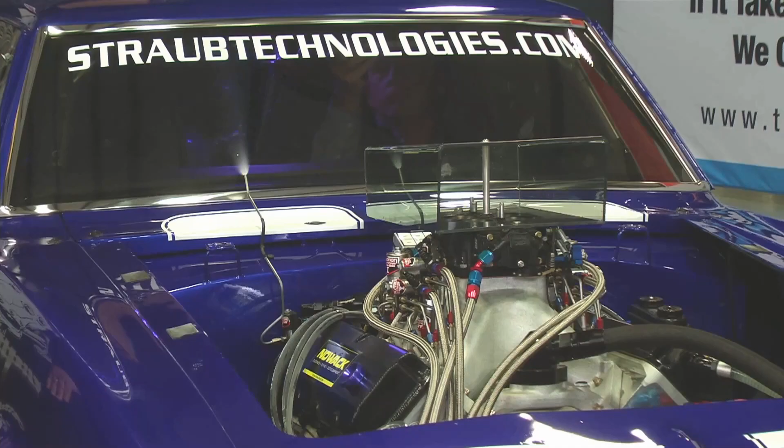Warren, these machines, you told us a little bit before, have just totally changed the way you can efficiently produce, try ideas, and do things. And we look at a guy like this, 21 years old, he's already working on the machine. We're going to work on some stuff here. Maybe you see a little bit of yourself in some of these young folks.

And Jordan, you guys were talking already. They were discussing speeds and feeds and different things about keeping the surface as clean as possible. Talk a little bit about that and how that information is obviously constantly updated.

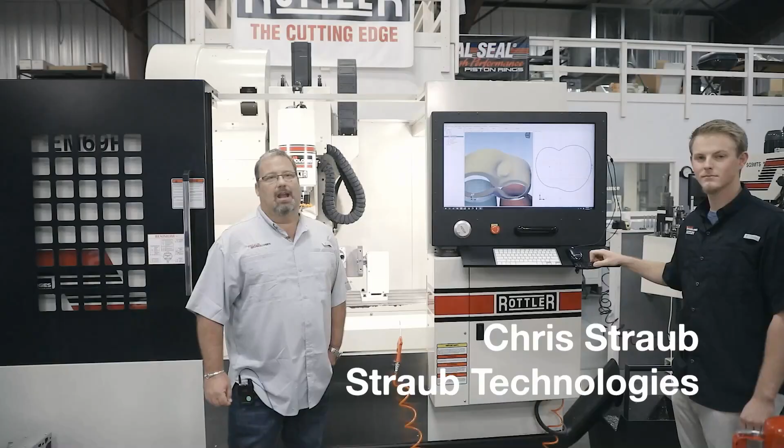Hi, I'm Chris Straub with Straub Technologies, and I'm here with Jaden McCurry. Jaden operates our EM69H Rottler CNC center that we use for porting. At Straub Technologies, we had come to a point where we needed something that could replicate the development work that we had been doing here for cylinder heads. Asking a few questions of people, what CNC cell we needed to buy for CNC porting, one company kept coming up, and that was Rottler. One reason is because Rottler is a self-contained digitizing and machining center. Not only can we use the Rottler to do the machine work, but it can also digitize the part that we want to replicate in the machine.

Straub Technologies grew from my garage. Never thought that I would be doing anything like this. I've been in the industry for 25 years, but people now with the DIY mentality, they want to be that Grumpy Jenkins. They want to be that Keith Dorton type person and build their own motor. So with the Rottler, being able to produce over and over again the same quality part was important to me. I need to provide something for my customers, and that's what the Rottler machine allows us to do.

When I bought the Rottler, Rottler came to me, and in talks, they said, Chris, you don't have to know speeds and feeds and all this stuff. The machine knows that.

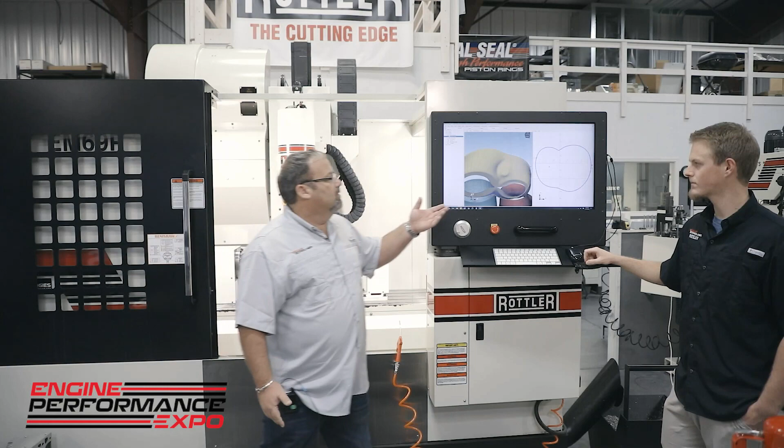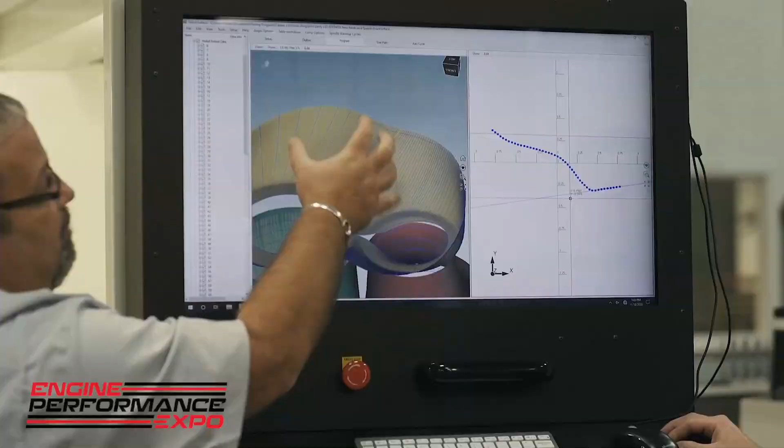So one thing that we do enjoy about the machine is the manipulation of any of the data points that Jaden is able to capture using the Renishaw probe on the cylinder head, easily seen here. And all of these lines presented captured data in the combustion chambers. Each one of these is where the probe has touched, so it's mapped out this combustion chamber of this cylinder head. And Jaden can then go into his computer system in his office, and anything that he needs to smooth or reshape is easily done.

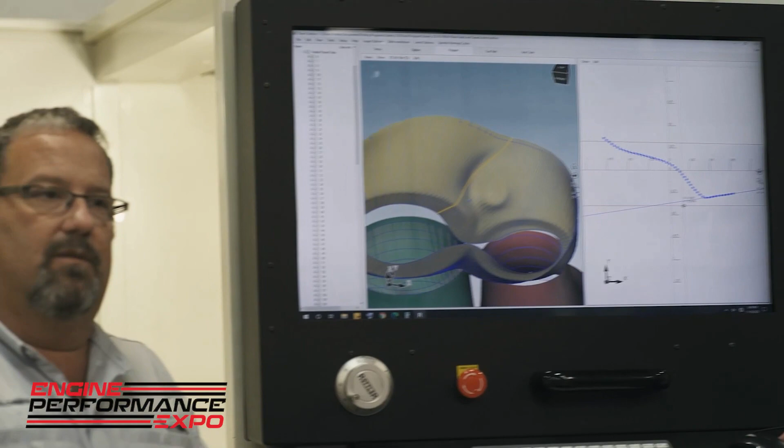That's one advantage the Rottler has over multiple machines, its ability to capture data so fast. You'll hear about people that have digitized over the years, and it might take them a week to 2 weeks to do an intake port, an exhaust port, and a combustion chamber. Jaden's been able to do this in a matter of a day. So why it's important to me is I don't have to have as many people, but can produce as many parts as some other much higher volume shops. So for me, as a small business owner in the automotive performance industry, Rottler was my choice.

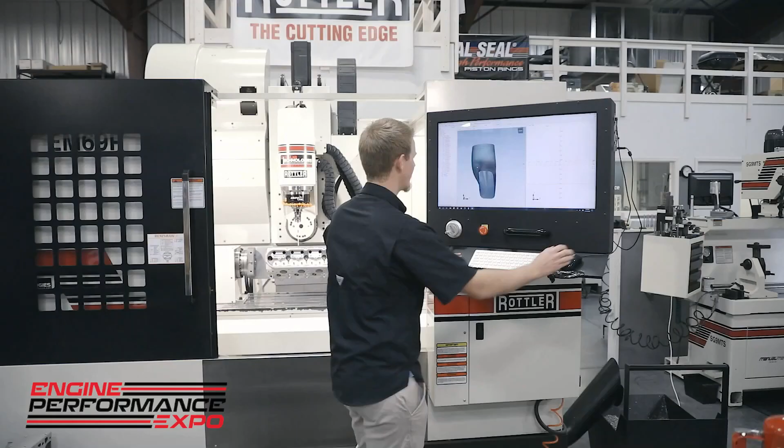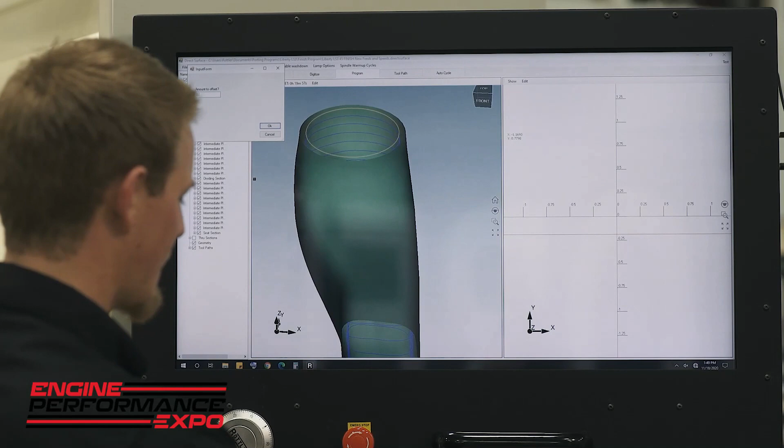Yeah, so this is a port that has already been digitized, and it's already got the through section, so it has its solid surface. If I want to go through and change, say, the plane that's right here on the seat surface, if I want to shrink this entire section, it's as simple as right-clicking on the plane. You can go to section offset, if I want to offset it, say 250 thousandths, just so you can see what it does. You can see it blew that entire plane out just that quick.

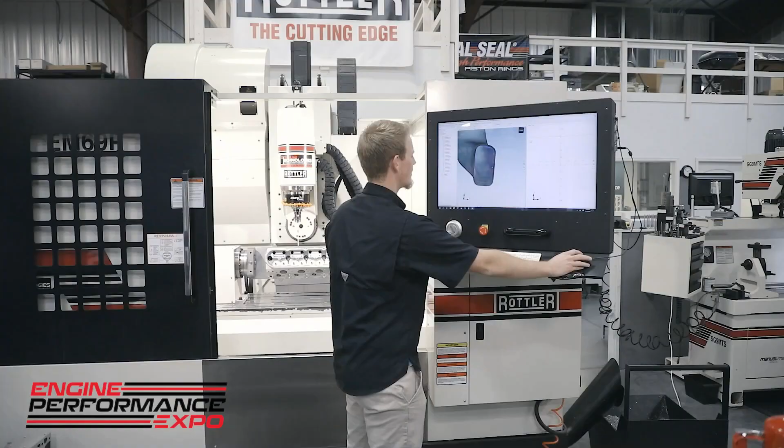So every little change that you make on this thing, you can see all the results just about as quickly as you want to do it. So you want to change the radius in the corner of this plane. Click that, you can change your arc. So you just make it a straight line or whatever. And you can see it right there immediately as you do it. So it gives a really good representation as you go through if you want to smooth things. There's really not a lot of waiting to get things happy like you want it to.

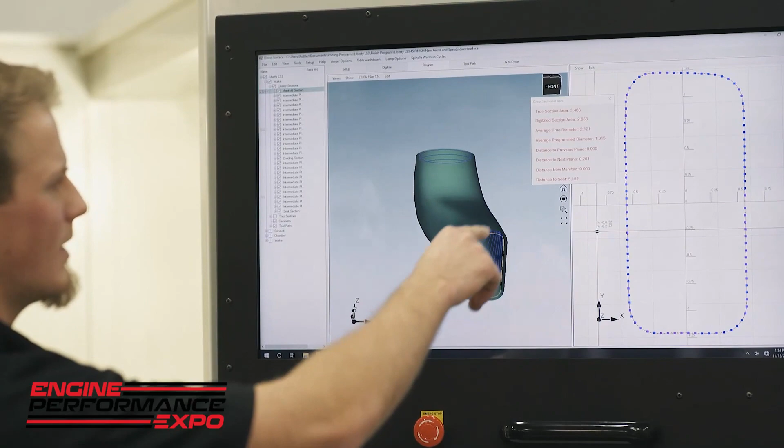With each plane that you go through and digitize, which is what all these sections are with the data points, it keeps record of the sizes, so it's got its own little graph, like a little representation you can keep track of, and you can check out your cross-sectional areas. So you pull the list up, so this right here is the manifold section, the first section on the manifold side for the intake port. It gives you your true section area, digitized section area, average true diameters, program diameters.

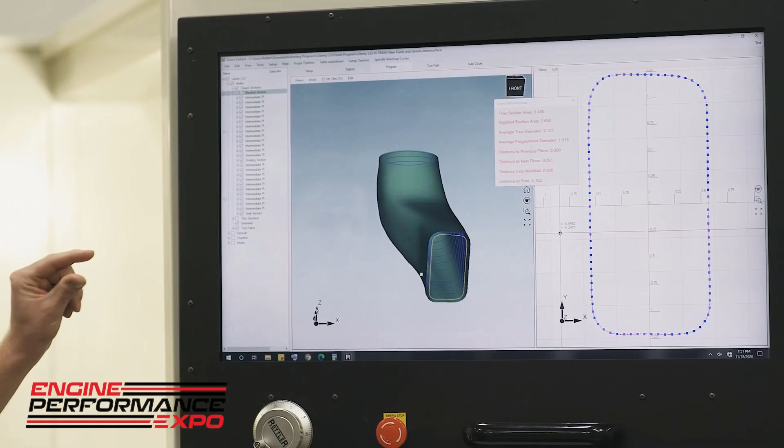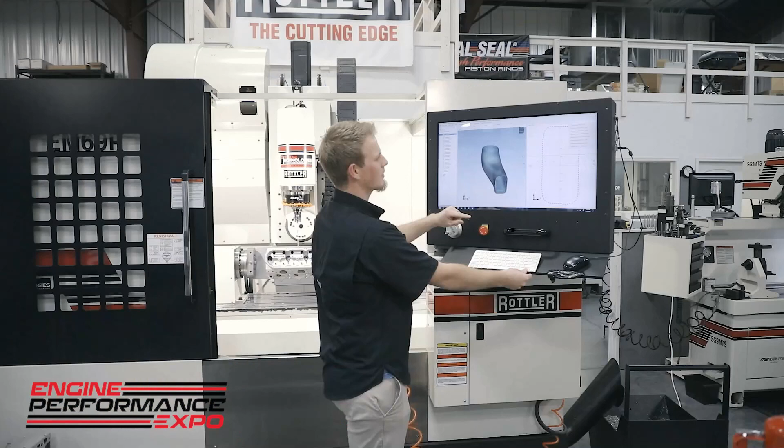It gives you the distance between the planes. It'll tell you how far you are from this manifold plane. So I'm starting right here at the manifold section. So right there it says distance to the next plane, you got 261 thousandths. If I go to the next one, it shows distance from the manifold, so it shows that we moved 261 thousandths. So if you pick a random plane throughout your port, it can give you an idea of how far into that port you actually are.

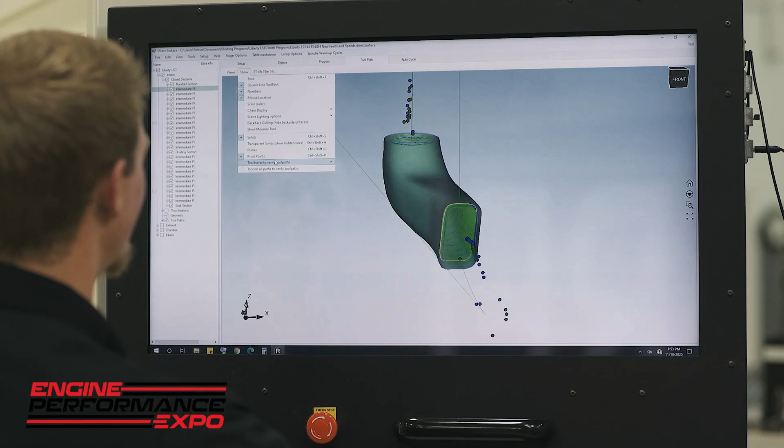Honestly, my favorite feature about this machine is after you've created your ports and you've got your tool paths created, it'll show you where your tool has run. In previous updates, you can hover your tool and it'll show a rendering of it pivoting on these pivot points as it goes through the port. And with the more recent updates, you actually have a function that will show you every spot that that tool moves throughout that port.

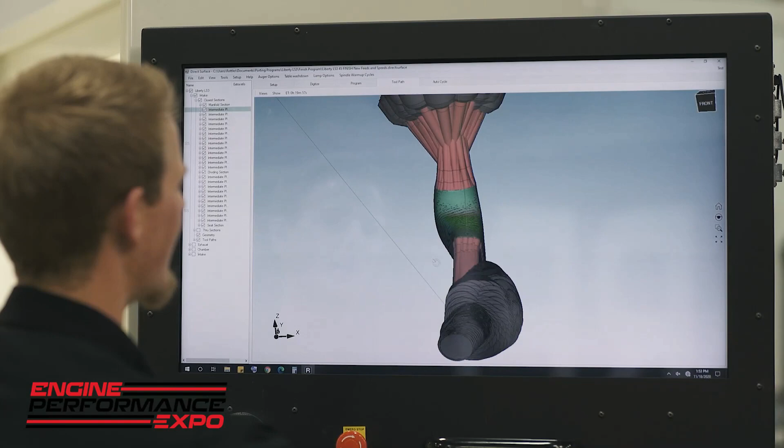And it's really nice because if you have long ports or ports that are making really sharp turns, if that tool is going to get down and try to rotate where it would actually dig into the opening surface, it'll show you that the tool will be poking through the side of the port. So instead of having to hover back and forth and hope that you catch it with your eye, or running it and just being really careful, you're almost guaranteed that you're not going to hurt anything with that feature.

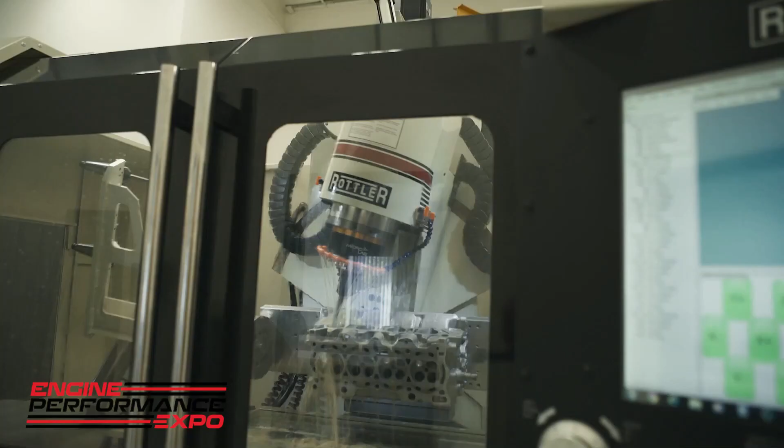Standing in front of our Rottler EM69HD, it's a cylinder head porting machine. Years ago, we were all kind of talking about possibly purchasing a machine, because we were porting a lot of cylinder heads by hand and it was taking just way too much time. You know, literally 8, 10, 12 hours or more for import heads and V8s. We do a lot of imports, a lot of domestic stuff.

So we looked at a bunch of different machines from a lot of different manufacturers. The Rottler basically stood out in front because it's an all-in-one type of machine. So we can hand port a cylinder head, get it on the flow bench, make little changes or whatever we want to do, get the head in the machine, actually digitize it in the machine, do all the modeling, soft modeling, look at how the port design looks, create all the tool paths, run little tool paths, make changes on the fly if you want, and actually port the head in the machine. It doesn't have to come in and out, in and out.

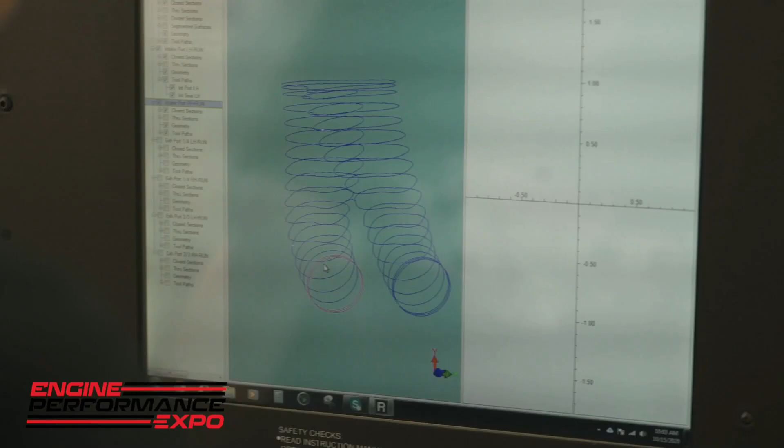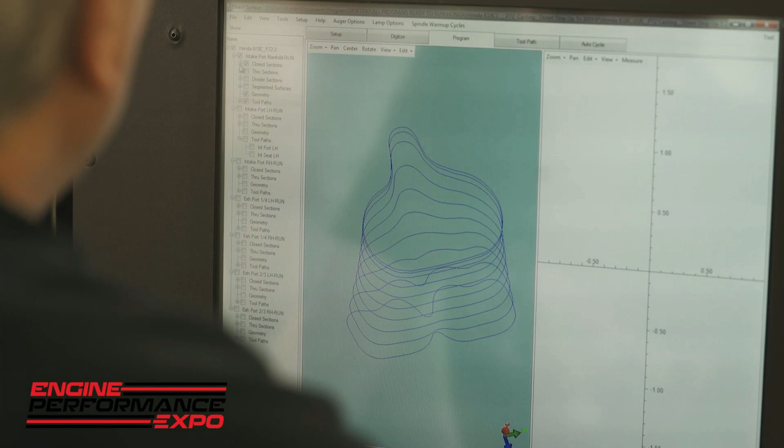Stuff that used to take us, like I said, 8, 10, 12, 14 hours, now with this machine, the CNC cycles are generally 2, 3, maybe 4 hours at the most. So you're definitely saving a lot of time. So basically with the Rottler software, after the head has been ported, you put it in the machine, and we start the digitizing process. The probe will come down and actually digitize each of these little pie slices, as we call them. So it's making a digital copy of what you hand ported.

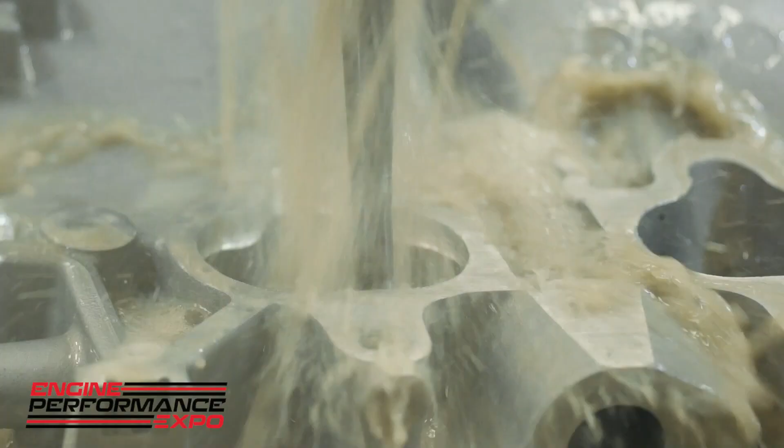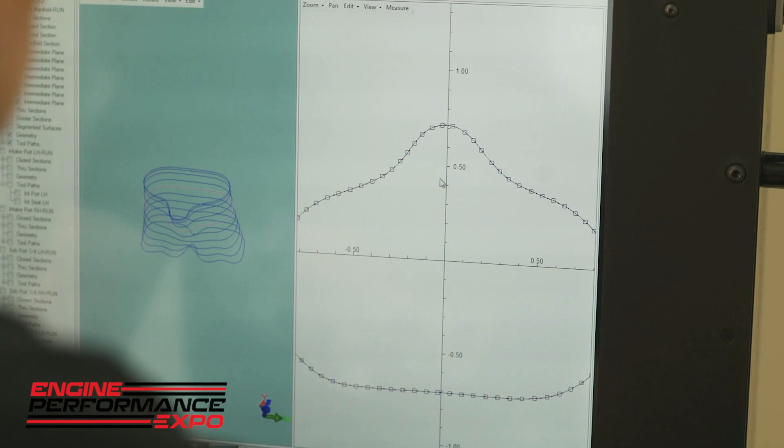And once these are all digitized, if you want to edit the shape of any of these, you can just grab any of these lines and points and move them. So if you don't like the way a curve is, or maybe the probe hit it just a little funny, or your port wasn't as perfect as you thought it was, you can edit it there. They also have smoothing operations that will help smooth out the port and line everything up a little better for you. And it's all done on the machine.

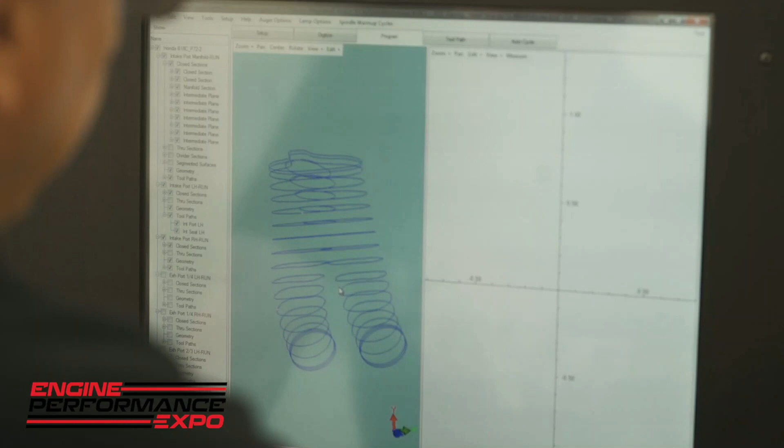And once you're done with that and you like what you see, then you can start creating the tool paths. After it's digitized, if you have to make any changes, you can make your changes. You can click on any of these points. You can move stuff around. It has smoothing operations to blend the stuff a little better. Sometimes when you hand port, you think you have it perfect, but you don't.

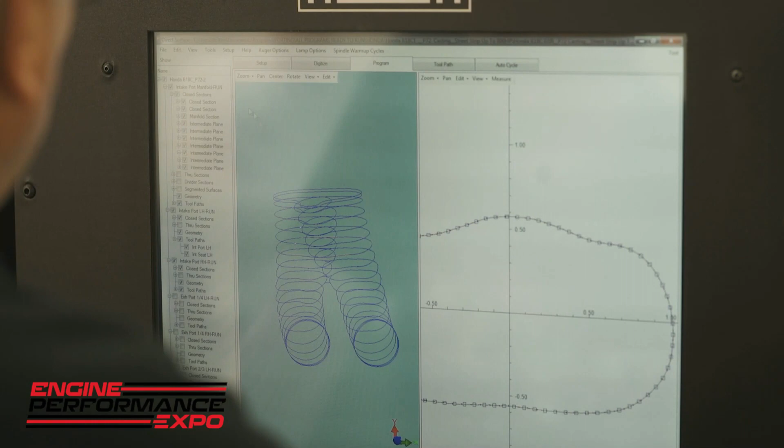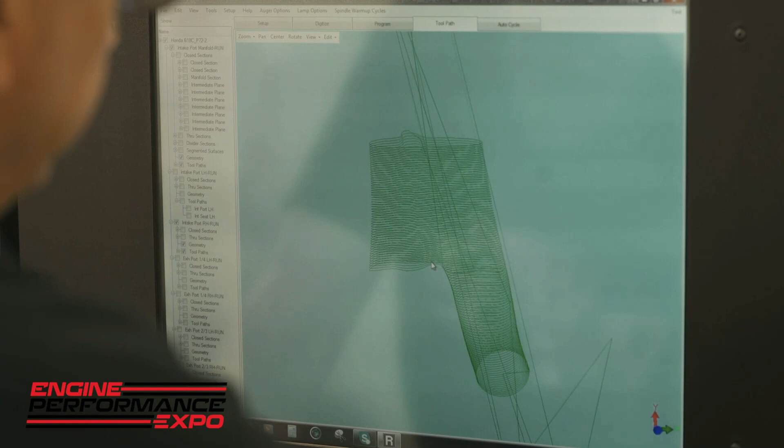So everything can be modeled and modified, and you can bring up a solid version and look at it on the port. So it's going to show you exactly what it's going to do before you actually start cutting the head. And you create all the tool paths. So basically all these green lines, this is what the porting tool is going to do, going through the cylinder head to cut it. And because it's saved and it's all computerized, it's going to repeat the same every single time.

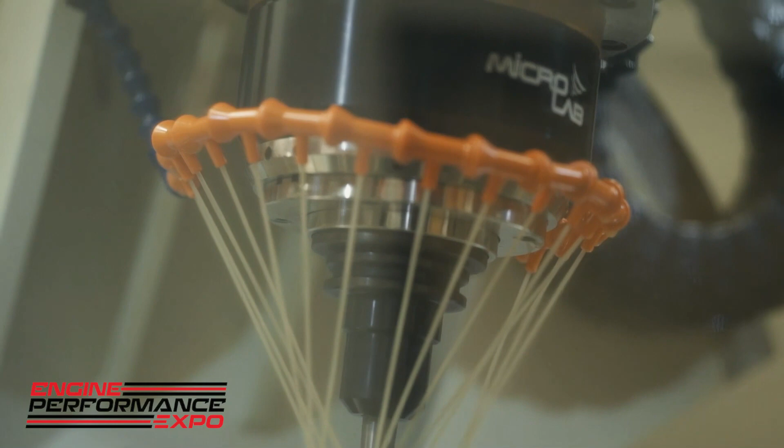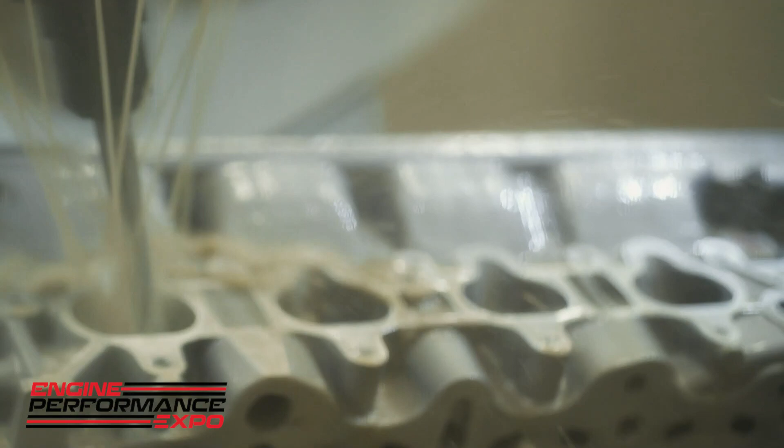We're not all about making the ports huge. We try to work with them, keep the velocity going and stuff like that. And with the turbo, you can actually CNC port the head, make more horsepower with less boost, which in the long run is going to actually help the engine. So you can have a little more streetable product. But if you do want to change it up, you do have the room to expand, pick up the horsepower level.

We're doing a lot of import stuff. Probably one of the hardest heads we started on and got trained on with the machine was the Subaru EJ series heads. Probably the hardest heads to jump right into. But we've got probably a dozen different programs just for all the Subaru heads alone, all the different castings and horsepower levels. We've got 400 or 500 horsepower street engines up to 1,100 horsepower all-out drag engines. And the sky's the limit.

The awesome thing about the machine is the repeatability. When you hand port, you can get tired, you can get sloppy. Like I said, the hours are just uncountless, but once the program is run, it makes it the same every single time. And if you do want to make a change, you make the change. If you like it, you save it, and it will do it the next time at the push of a button, basically.

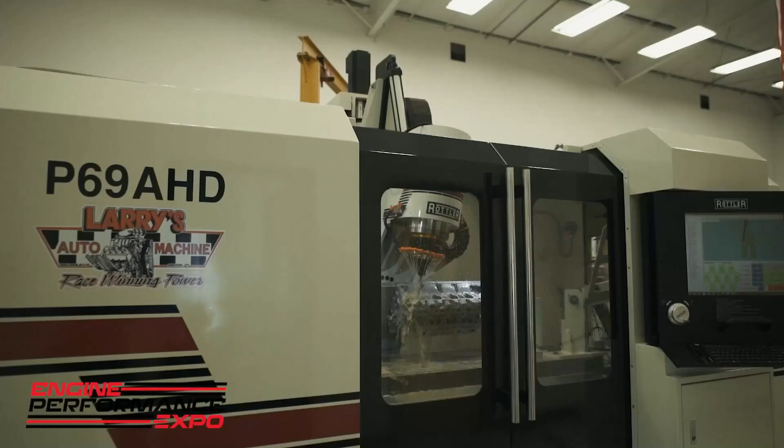We quite often get asked why we picked the Rottler over some of the other machines, and it's just we've had a relationship with Rottler, with the other machines we've bought in: the F68A serial number 1, outstanding machine, our cylinder hone, the H85, the seat and guide machine. But it's just the price for what you get is phenomenal.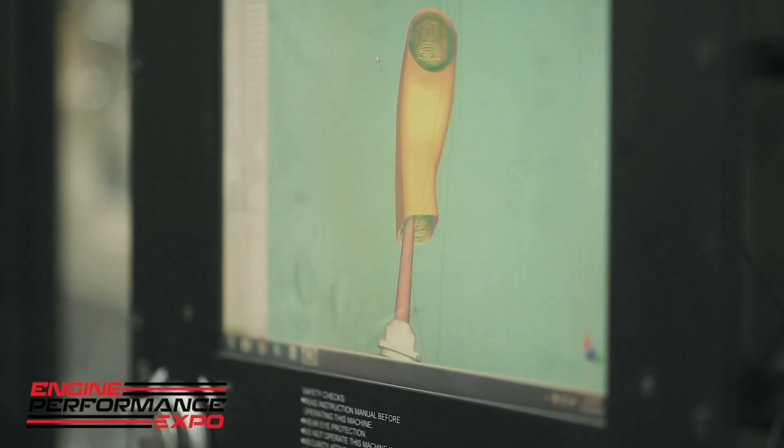My name's Brian Harrison. I work for BES Racing Engines. Worked for Tony for about 9 years. Been running these current machines here for about 7. We're here to talk about the Rottler P69.

We use this machine to run numerous cylinder heads here at BES, and this is one of our heads, a pretty known popular head for Ultra Street. It's a high port Trick Flow small block Ford head. We can run this whole particular head in roughly about 3.5 hours in this machine. Intake port, chamber, and exhaust port, and we also run our pushrod clearance in this too. That's kind of a nice feature to be able to do.

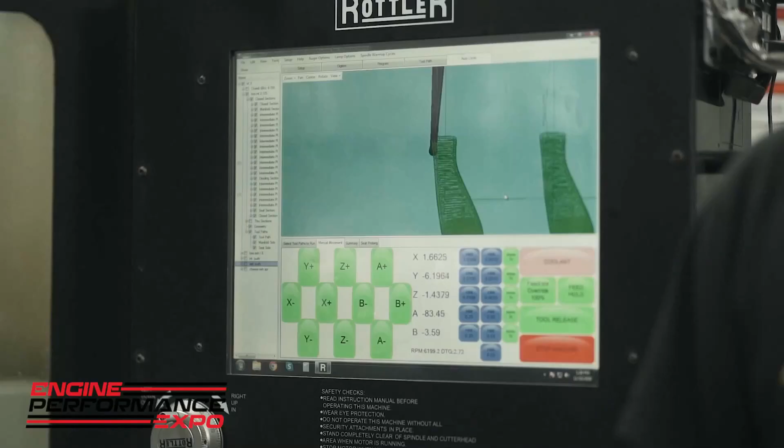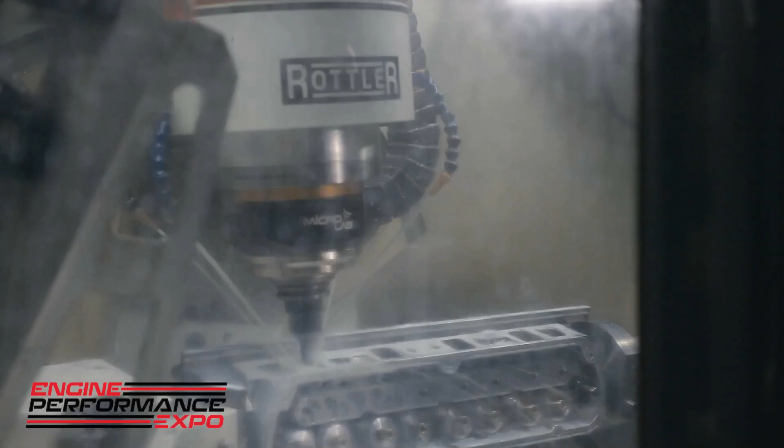This is an intake port. Sometimes we use different length tools because sometimes they chatter, just because of tool length, and try to cut more material out. We just try to cut as much as we can with our tooling. With a long tool like that, it's hard. This particular head here, we plug the exhaust bolt holes, then we face mill them, but I just do that manually. Just use a fly cutter and shave off the exhaust flange to make it smooth.

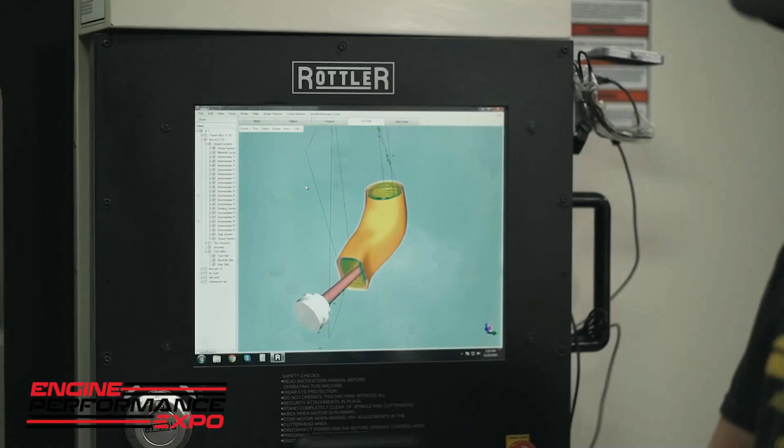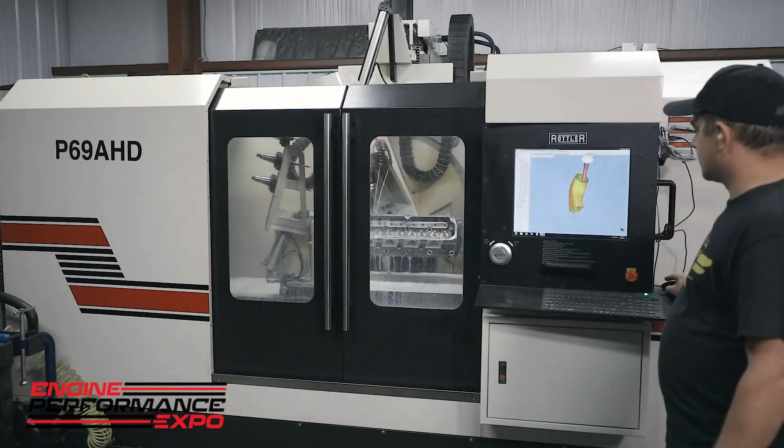We go to roughly about the center of the short turn to keep the tool from shanking out, which on the long side would be just a hair below the valve guide typically, kind of where I shoot my line of sight here. I can show you here. This is our tool path. Being able to bring up the tool path helps out a lot to save time from trying to dry run something, make sure the tool's not going to crash. It definitely helps in a lot of different scenarios.

Rottler, especially in the cylinder head department, built a CNC machine that was that fast digitizing stuff. When I bought that machine, for most guys it took a week to digitize a cylinder head, intake, exhaust, and a chamber. With Rottler stuff, you can get it all done in 8 hours easily. My guy's been doing it for quite a while, and he can do it a lot faster than that now. It's very user-friendly. It allows somebody that's not trained to be a machinist to get in there in a couple days with training.

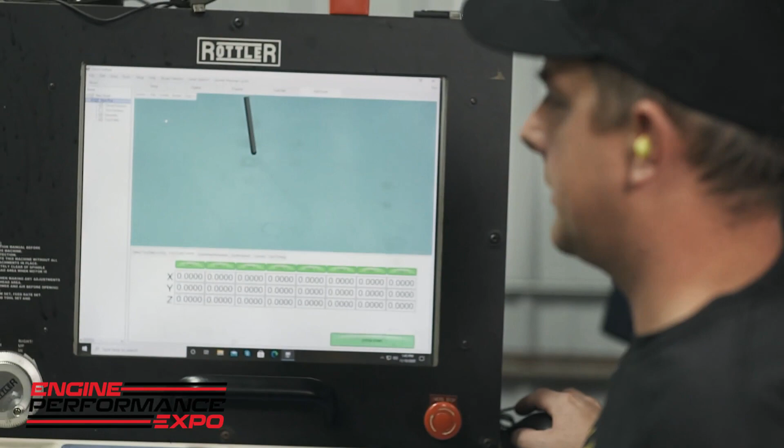You're porting heads. You're ready to go. So with the P69, we have the Renishaw probe. So we can basically just go in here and click on, bring up a program, make a program, click on here. You can add ports, chambers, you can do patches. But anyway, I brought up a port here, just like an intake port.

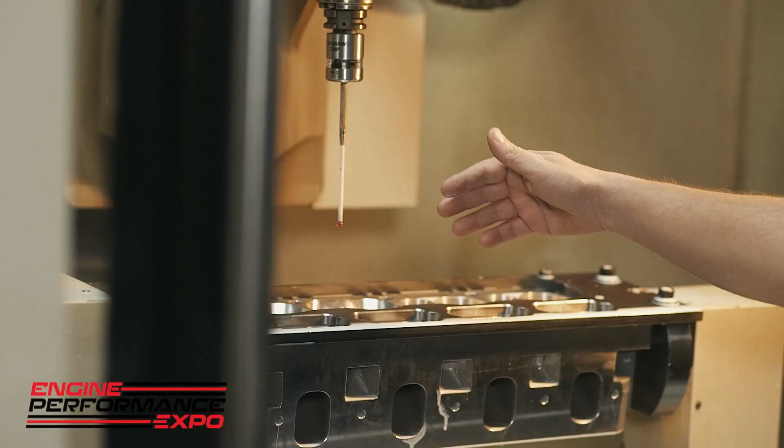So basically you would want to start the port on the intake manifold side. We've got to develop planes to digitize to create a port. And you can do all that and roughly do all the digitizing itself and creating tool paths. You can do all within about an hour and a half to 2 hours, according to what kind of intake port you have. It saves us a lot of time over doing something like that by hand.

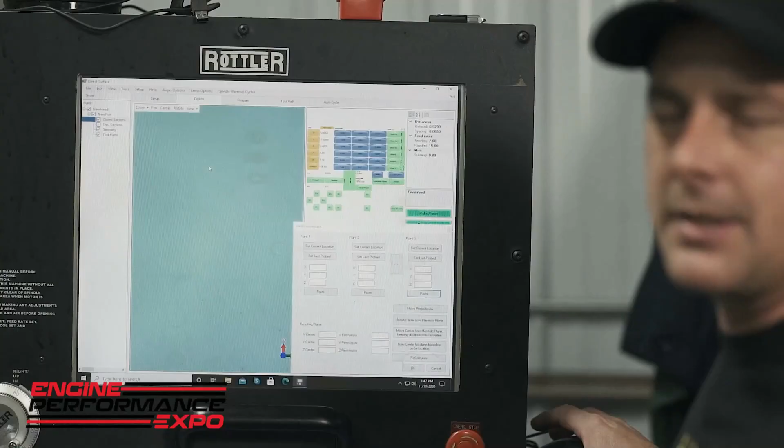To be able to come in and do that for the engine building side of it to get the job done, I couldn't even say how much time it saved us, but it's an enormous amount of time. You can digitize a chamber probably an hour, 15 minutes to an hour and a half to get it ready to run also. Say you have a port created, you can go in here and you can just manipulate a port, so you can move the whole port X, Y, or Z. You also have a blend deal for the tool path to make it smoother.

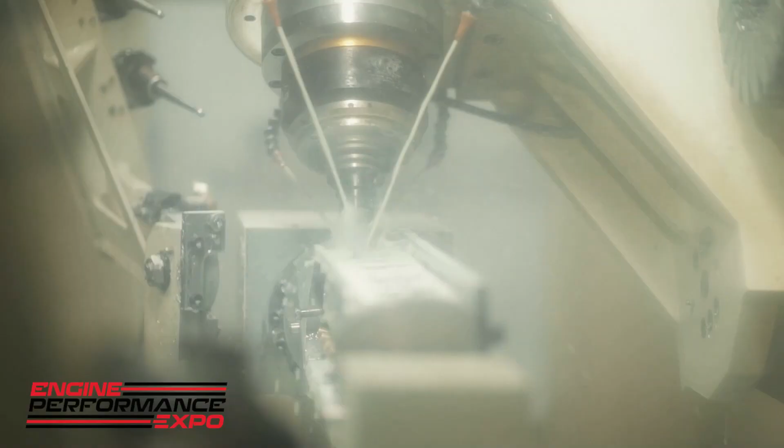We run about a 30 to 32 thousandths step over typically on a finished path. So like say on our OEM stuff, the guys don't even have to blend them. I digitize a little area on our OEM stuff because it's so consistent, so the guys don't even have to really blend it. So it works out really nice, saves a lot of time. You just blend out one bowl and just digitize that little area where you would do it by hand. And sometimes you got to play with the size to get it to where it don't cut too big or too small, but it works great.

So mostly we do all of our digitizing in this machine here, really for no reason other than we just try to keep all of our new data in one machine. So you can just take basically a flash drive, and you just hook it in and get your data in a flash drive, then you can just transfer it to the other machine.

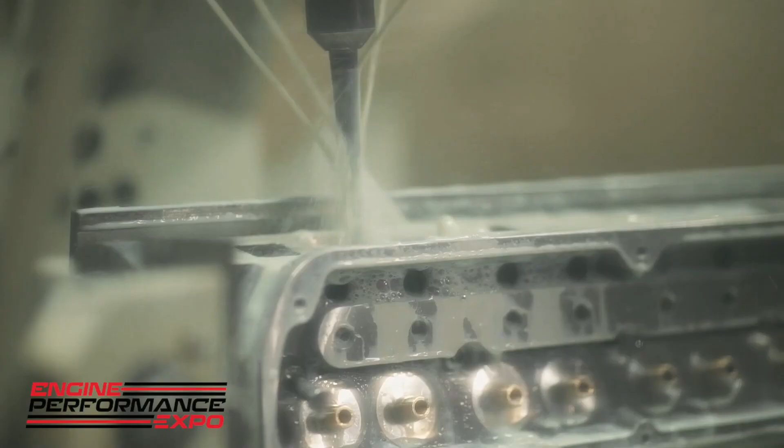The Rottler cylinder head machine definitely made it profitable for us to do one-off cylinder heads and CNC them, and that's a huge help because we do mainly one-off engines. So we don't do a lot of cookie cutter stuff that you can afford to pay somebody a week to digitize ports for you and stuff. This really upped their game.

What a day, what a day, what a day. My brain is swollen. I've learned so much today. They told us, don't start cars. We are not going to listen.